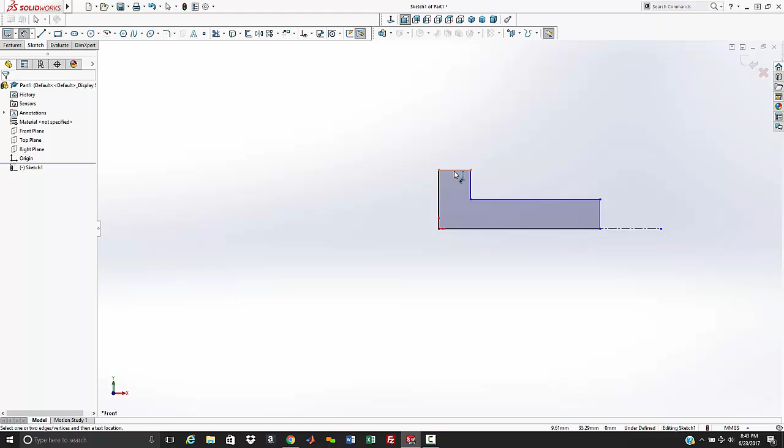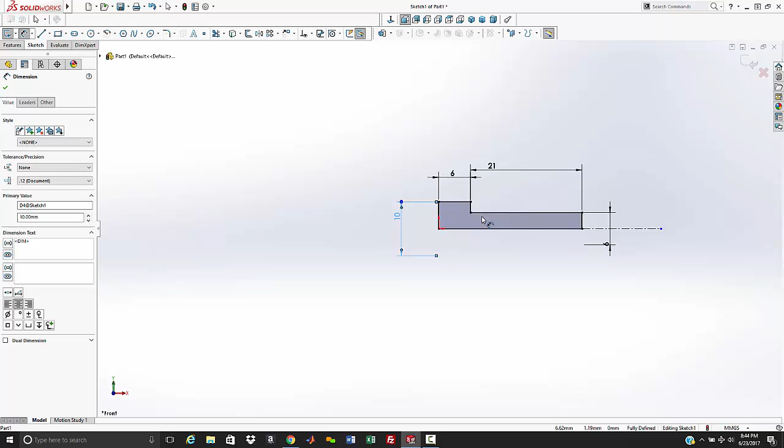Okay, and now we'll bring in our dimension tool. Actually, let's pull this out so we can get hold of that. Now we'll pull in the dimension tool. This here is 6 millimeters. This here was 21 millimeters. And then from here to here, being a diameter, is 6 millimeters. And here to here is 10 millimeters. Right? Yeah, 10 millimeters. Okay. So there's the basic shape of our bolt. Now, I'm going to pause the video here for just a second.

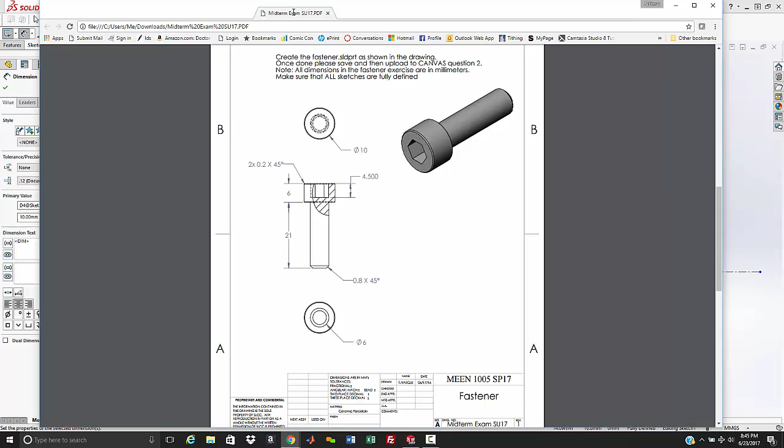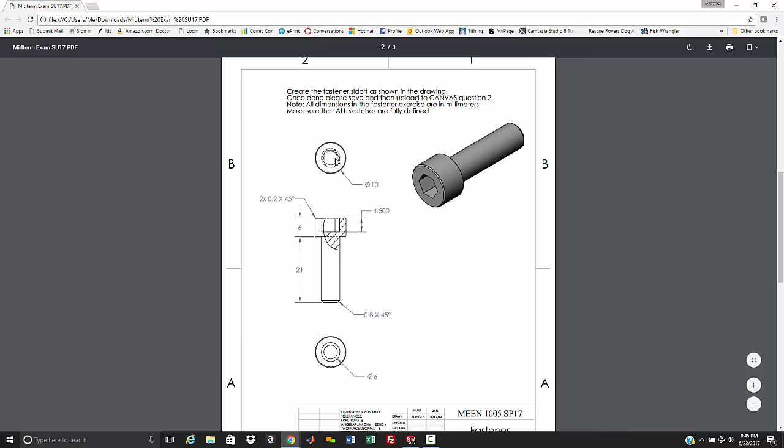Okay, I unpaused the video. Apparently, some of you had problems interpreting the drawing. So this is the drawing that was given to you for the exam. As a PDF, it had all 3 parts in it. So this is the bolt, and the missing dimension on this one is the width of the hex. I gave you the depth of it, but I didn't tell you how wide to make it. If we look here, we can see this would be the diameter of the threads, and that's going out to about the same diameter, so point to point should have been about 6 millimeters.

Again, I did not expect you to try and interpret missing dimensions. Your machinists, when you hand them a drawing and it's missing a dimension, they'll be on your desk saying, hey, Art, this is missing a dimension, put it in. And then you tell Rodney, just go back out and make your parts.

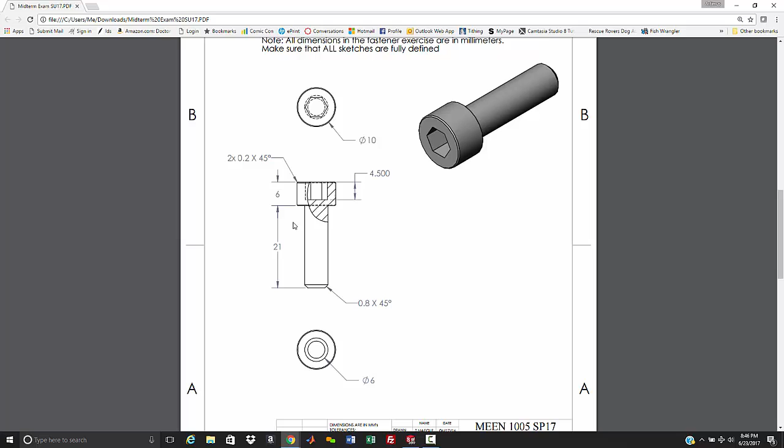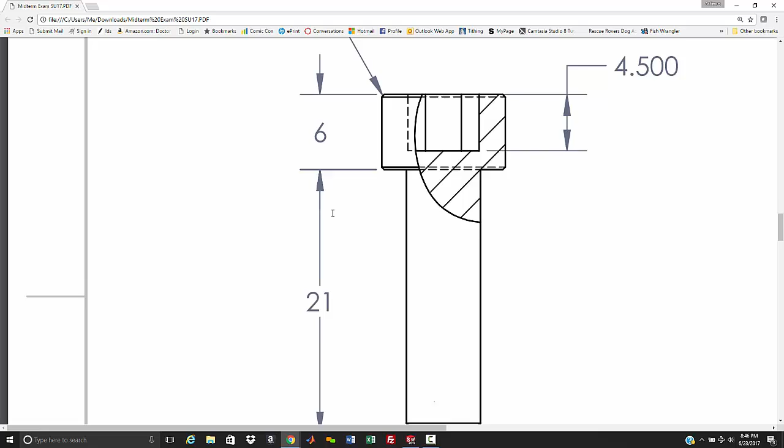Anyway, the biggest problem on this part was this dimension right here. This is a standard call out saying there are 2 times a chamfer that is 0.2 millimeters by 45 degrees. The 2 times means that there's 1 here and 1 down here. That is a standard call out, and every machinist will know that it has to have a chamfer on each side. And it could be that this was too small. Some of you put a radius on that corner. If it was a radius, this would have an R by it, saying that it's a radius.

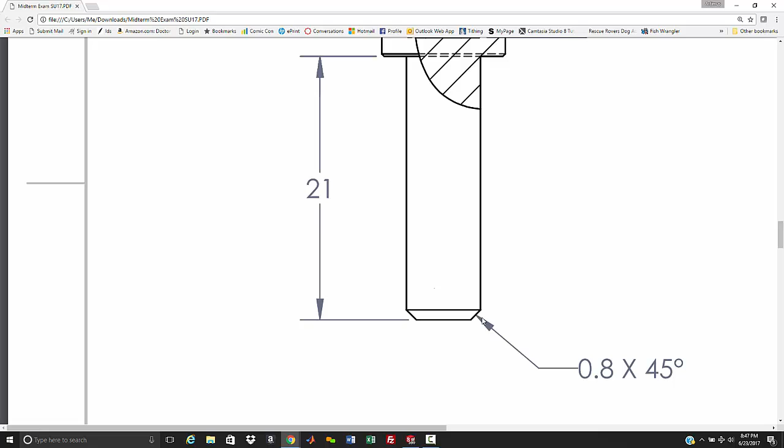And then also, one more thing that was an issue here. Like this one is 0.8 by 45. A lot of you did the 0.8 along the hypotenuse of the chamfer. Standard dimensioning suggests that the 0.8 is a linear distance, so either down the length of it or across the face. That is the 0.8. Again, I did not mark you wrong if you did the hypotenuse.

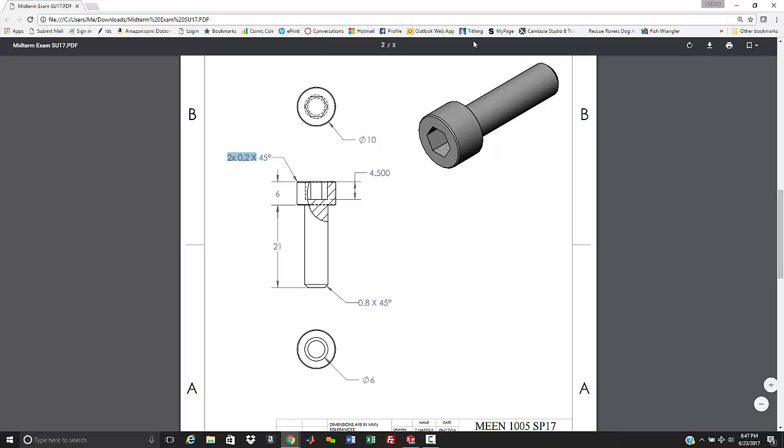I'm not here to teach you how to read blueprints. I'm just bringing this up as an FYI, so in the future you know that that's what it means on a drawing when you see that kind of a call out. So back to the model. So on this corner up here, we need a chamfer of 0.2 millimeters on this corner and this corner.

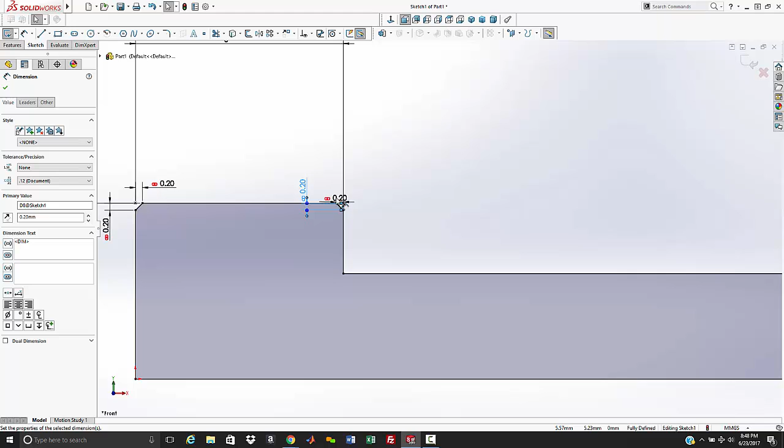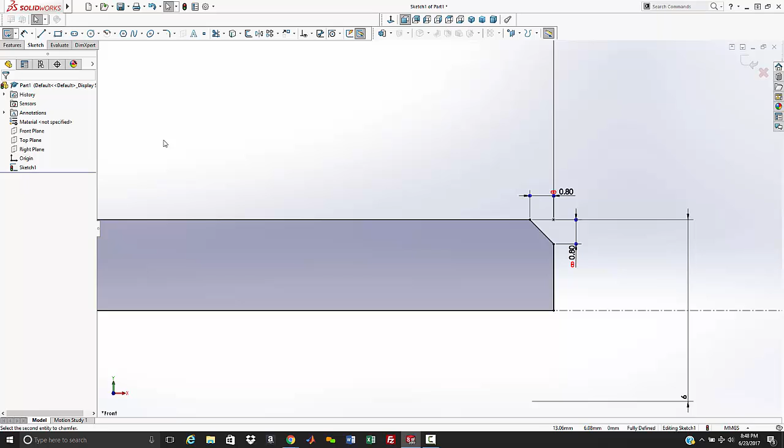And you'll see that it's got the 0.2 down the leg of the chamfer and not across the hypotenuse. And then over here we have a chamfer of 0.8. Again, it's 0.8 across. And I did that in 2 steps because you'll see this little infinity sign here. It's actually a chain link. That means that those dimensions are linked. So if you come in and change this one, it will automatically update all of them. It's supposed to update all of them.

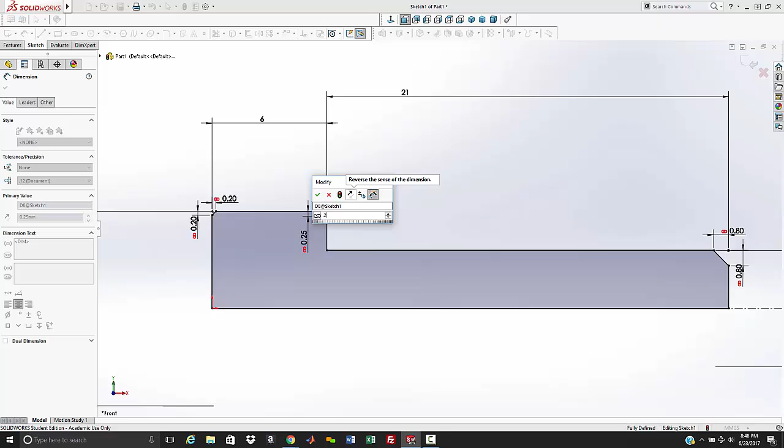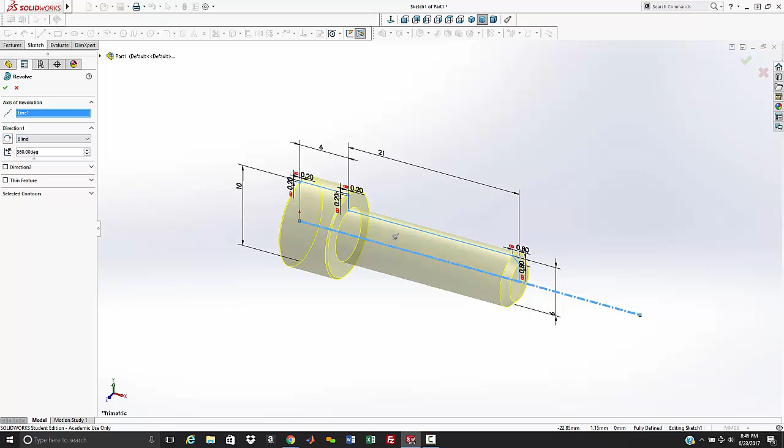That may be something new in 2017 that only does the one associated with its corner. So see, even I learn something new every day. Okay, so there is everything round on this part. And now we'll just come up here and close our sketch, which opens up the dialog box for the revolve. We want to go around the center line because this is the only center line in the drawing. It'll automatically default to it. We want to go 360 degrees and we'll hit OK. And so there is our bolt.

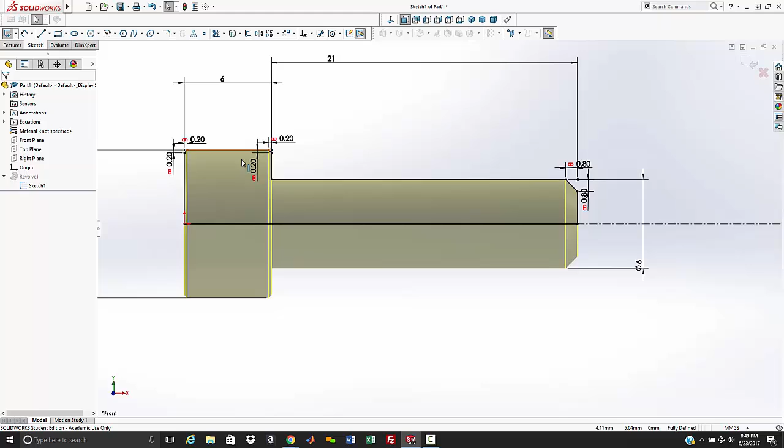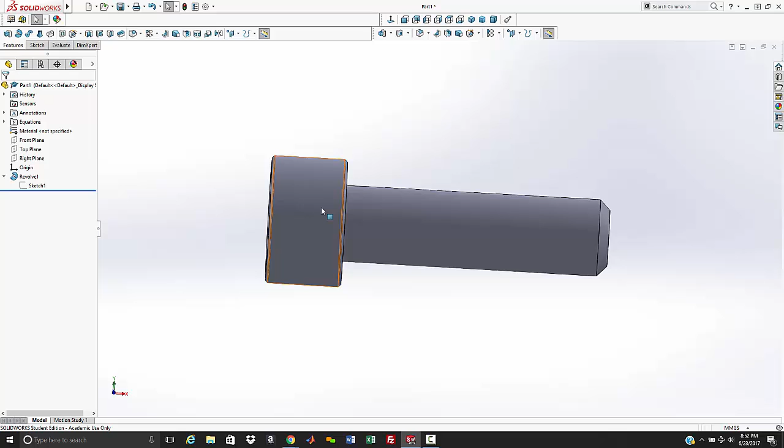Now you'll notice in my drawing that because I took everything off of the origin, everything was black as I dimensioned it. Everything turned black. That means everything is fully defined. Now, if I didn't start here, you see that now everything's blue. Everything's still not fully defined, but things can move. So by connecting that to the origin, everything turned black. That sketch is now fully defined.

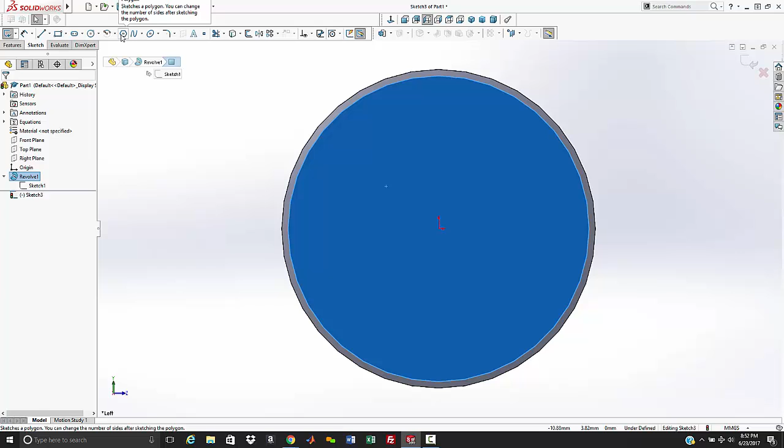Okay, now we have everything modeled that is round on this fastener. The only thing we have left to do is to put the hex shape in it. So we'll bring that surface up and we will click on it and do a cut. And then come in here and grab the polygon and draw it. Okay, so to make this just a little bit easier, because I didn't give you a dimension, and we're going to go 6 across the points.

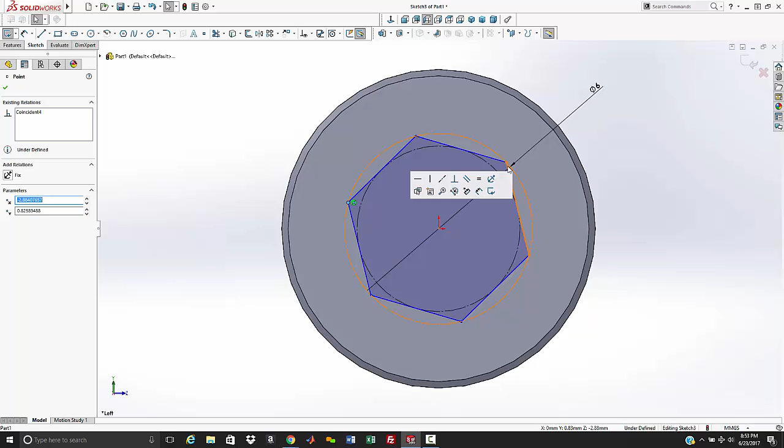I'm going to draw another circle in here and make it a construction that is tied to that point. So now as the points change, that circle changes with it. That just makes it easier to define this to be 6 millimeters across the point. But you notice everything's blue still because it's not fully defined. It still has rotation. So we need to define the rotation of the part. And that can be simply done by grabbing any surface.

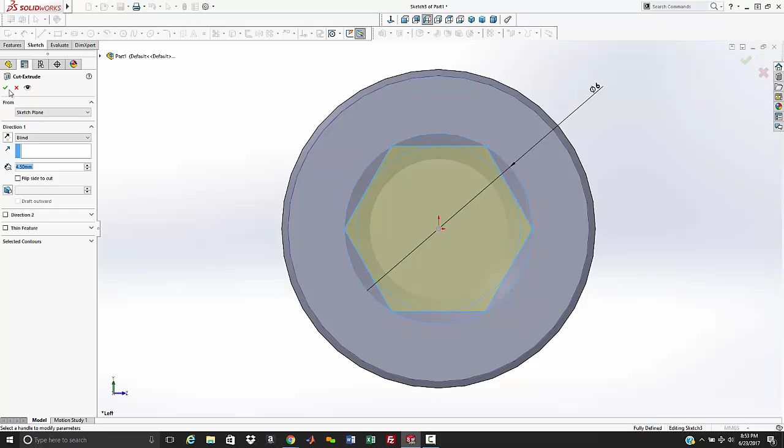There is a possibility in your design that this surface needs to be parallel to some other surface on your part, and you would do so. But for right now, in this part, it doesn't matter. So we're going to grab that and tell it to be horizontal. There we go. And everything's turned black, so it can't move. So this is now a fully defined sketch. And we'll hit the close button and go down 4.5 millimeters. And there we have our screw.

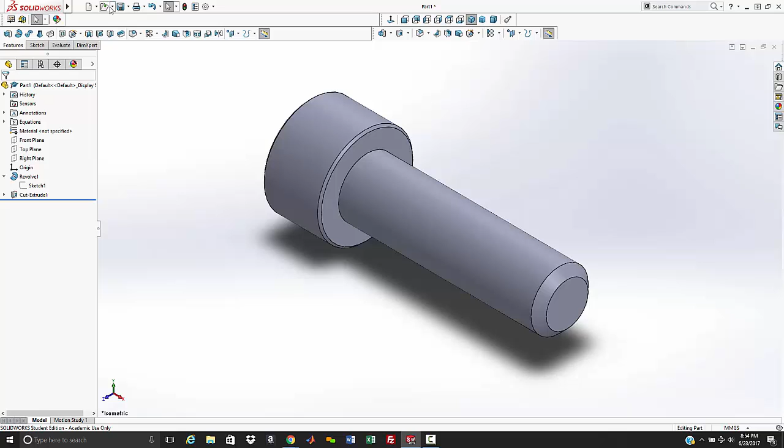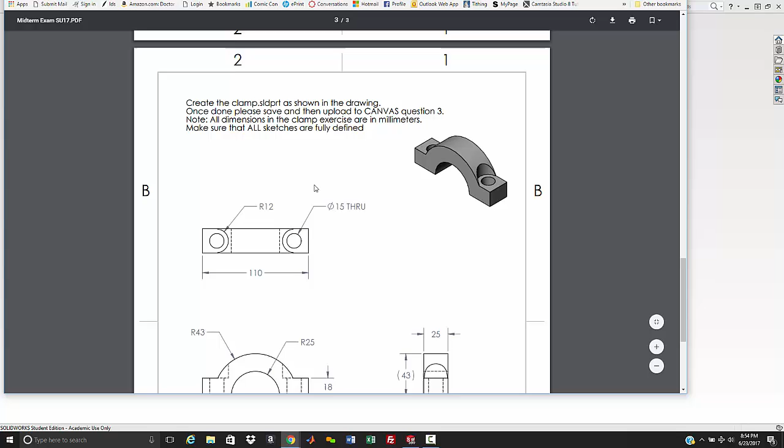You can have SolidWorks put a threaded feature on this, makes it look like a real bolt. We don't cover that in this class. I think you can find a tutorial inside of SolidWorks if you're interested in learning how to do that. So that was the first part. So we'll save this as, what is it? Fastener. Fastener Summer 17.

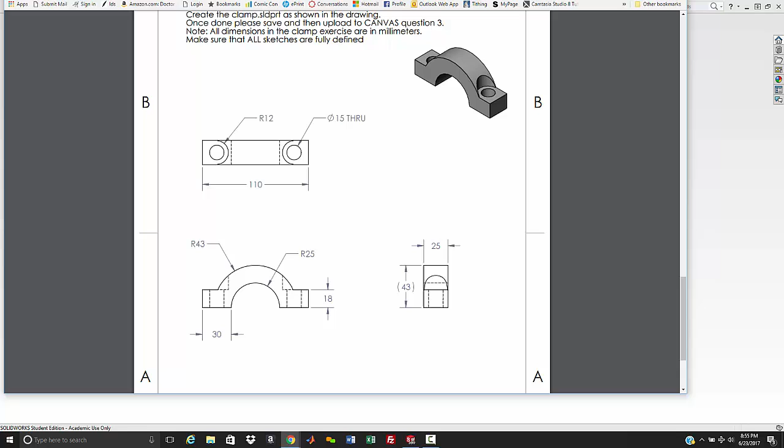Okay, so the next part that was next in line in difficulty was this clamp. It really wasn't too difficult. I don't think there were too many people that had real major issues with this. Again, the biggest issue was fully defining your sketches. And also, there's another missing dimension on this one, and that is the location of the holes, distance between them, or the location from the edge. When I designed this part for this test, I basically centered the hole on this edge here, but because it's not in the drawing, I could not penalize you if you didn't put it there.

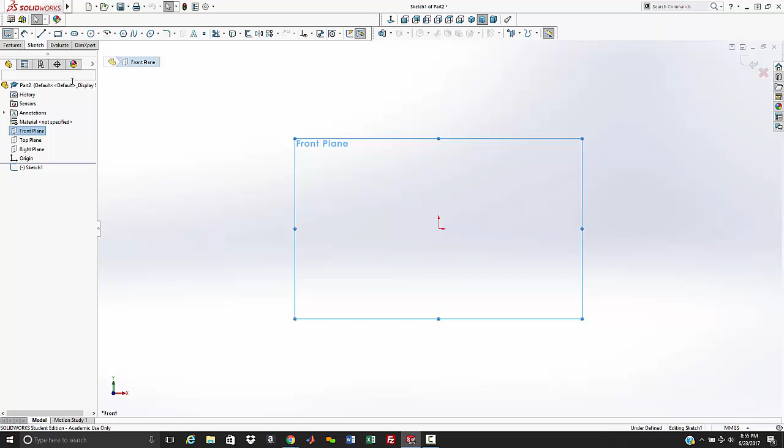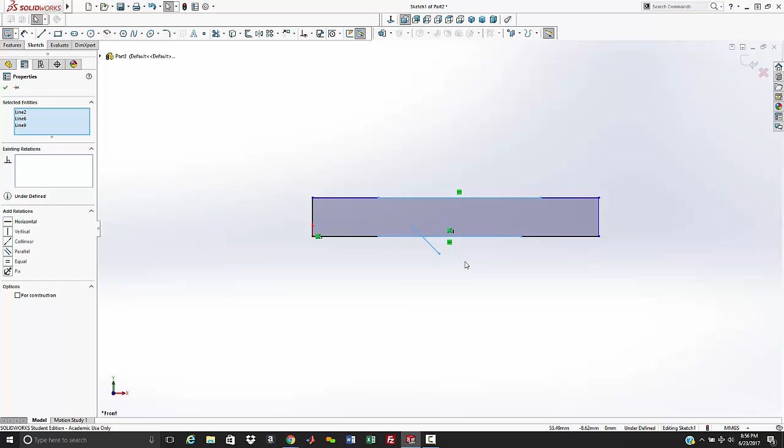So again, I apologize. So now we will make this part. If I can get this out of the way, there we go. So again, we'll start with a new part. This one is in millimeters, so we'll change our units down here. Again, I like to start with the front, do an extruded boss. And again, to fully define everything, I'm going to start with my point in the origin, and I'm going to kind of sketch this out.

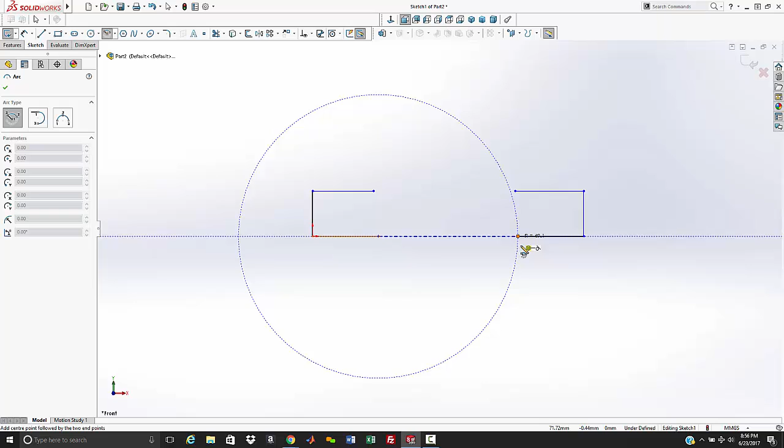I'm going to leave a gap there for the radius, come up, come over, gap radius, over, down, and then I'm left mouse clicking and dragging backwards across those to select all those lines and delete them. Okay, so now I want this one and this one to be collinear. They already are, which will make these two equal. These two here, I want those to be equal. These will come out equal. Oh, that was not collinear, those are horizontal. So if I make them collinear, now when you change one, they both change.

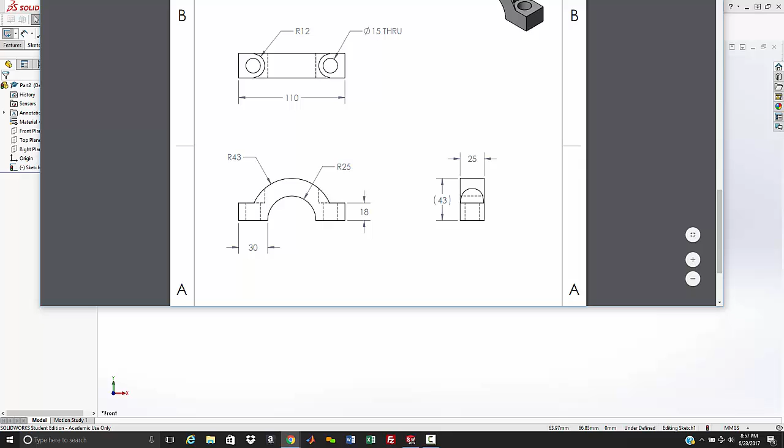Okay, and then we need a couple of radii, so we'll grab our arc tool and go from there. That's the wrong arc tool. Oh, sorry, I'm used to not tangent. 3 point. There we go. And do that arc and do that arc. Okay, and again, there is no indication.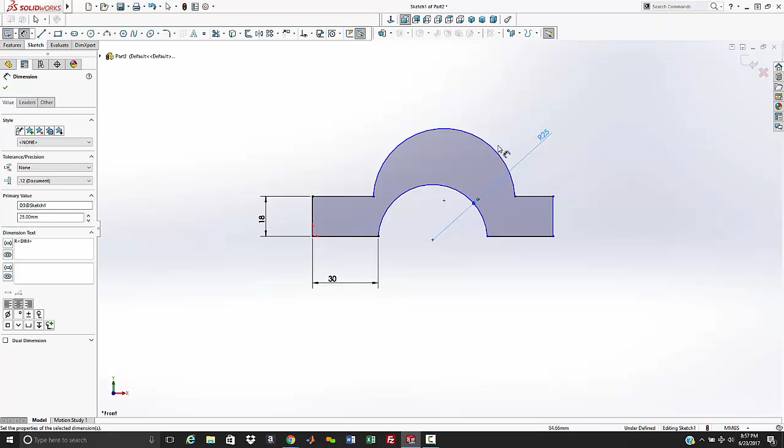That's another missing dimension on this drawing, is the distance to the center point of this. However, you can go backwards because of this dimension here. So let's do it based on the information we have. That was not a trick question. It was a missing dimension. So if you didn't get that, you are not penalized. So let's do what we know.

We know that this here is 30. We know that this is 18. We know that this is 25. And we know that this is 43. Oh, that looks real funky, so we can grab this and drag it over here. And let's do an equals on these two here.

Okay, so to get this 43 reference that was in there, we'll grab that point in the center of that arc and come down to this leg here and make it 43. That's 43 there, that's 43. Okay, and then if we grab these two here and make them concentric, that brings everything in.

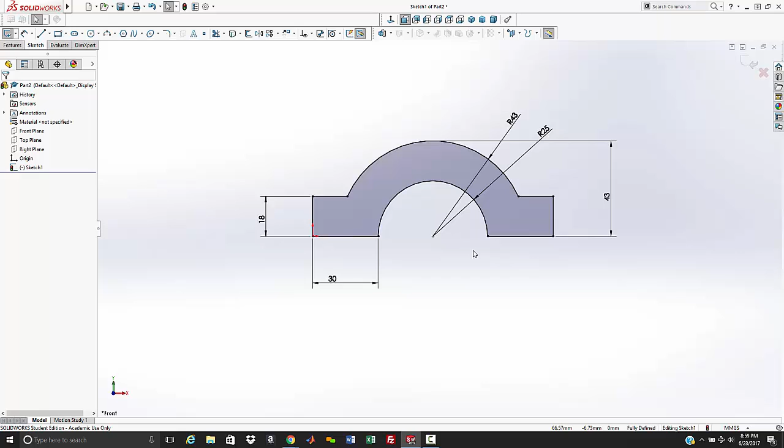Again, that was not, you know, I don't think I knocked anybody off for this because again, the drawing did not specify the center point of these two arcs. I knew when I drew them that those were concentric, but there's nothing in the drawing that would suggest that it would be so.

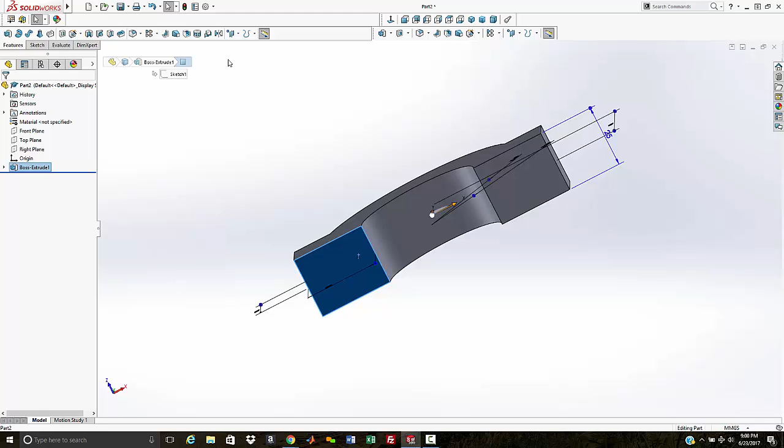Okay, so we have that. Now we'll close that sketch. It brings up the boss extrude dialog box. I like to do mid plane and my distance, which is 25. And so there is the shape of the clamp. Now I come down here, and again, this is one of those missing dimensions. I'm going to do the extruded cut, and I'm going to draw a circle and another circle.

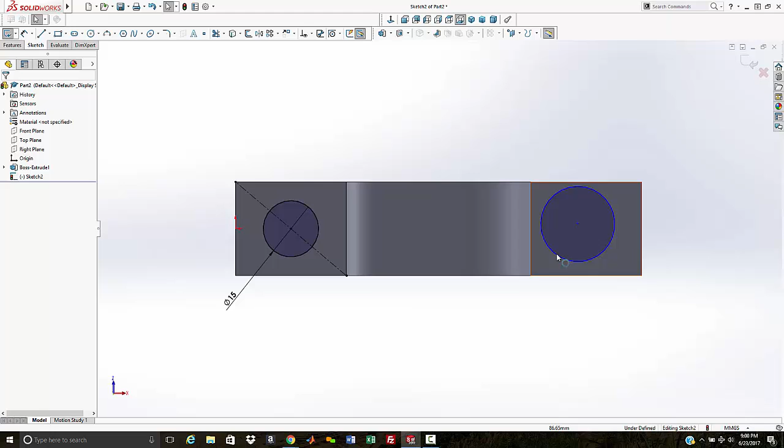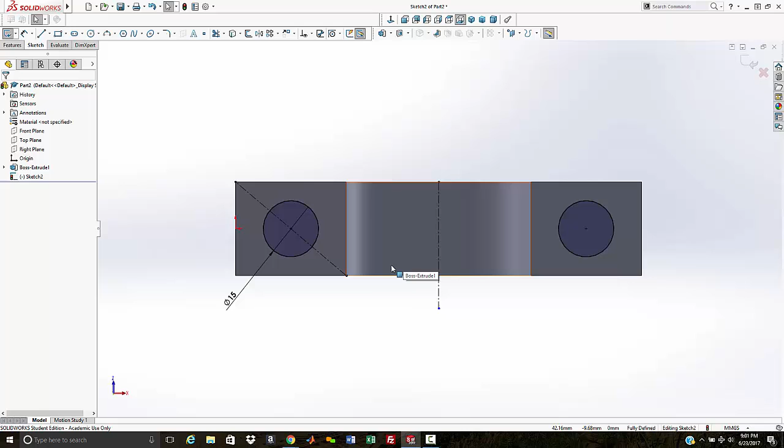There's a couple of ways to do this. The missing dimension does not imply that that is in the center. But this is the way it was intended to be. With this being a diameter of 15, and you'll notice it's black and centered on that space. Now to make this one the same, I would use symmetry. We know that that part is symmetric there, so if we grab this, this, and this, and tell it to be symmetric, it's there.

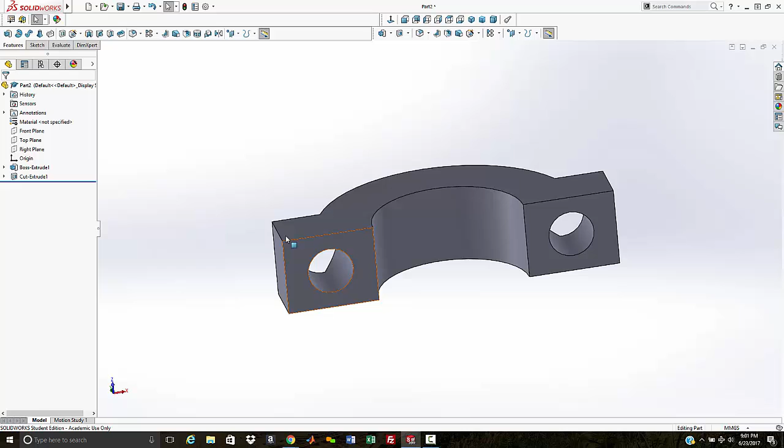That was the way, sorry, I didn't mean to scream at you. That was the intended design modeling that I had expected when I created this part. So now that everything's done, we'll close the sketch, go to a through. We don't need to go both through all, and there is our hole.

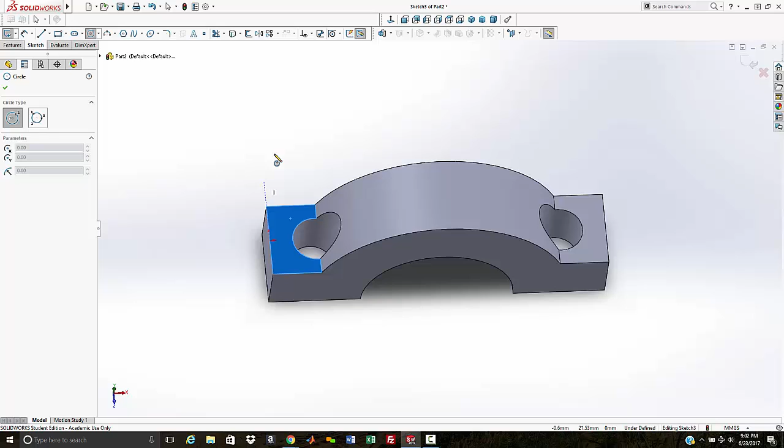Now you could dimension that to the center with a 12.5 millimeter offset, and then whatever dimension you did here. But if you dimension it from the center and you come in and change the width of this to 50, your hole would no longer be in the center. And I just do that to point out, hopefully you learn from my mistakes that I made in my early days.

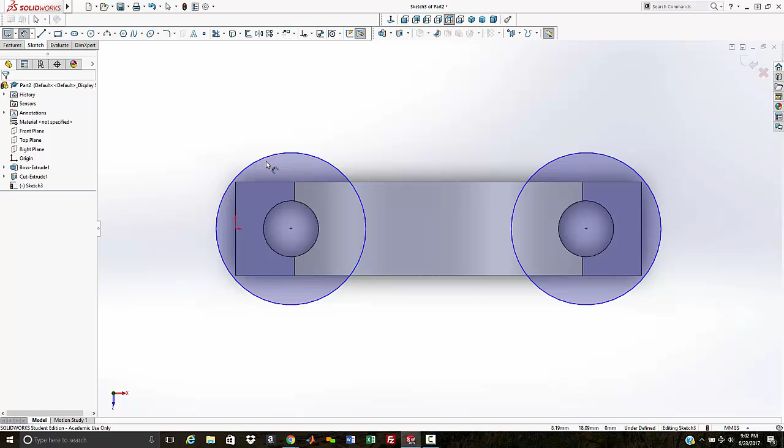Okay, so the only thing we got left to do is to put the little counterbore on top. So I'm going to grab that surface there, do another extruded cut, grab the circle, bring it parallel or coplanar to the screen, and draw a circle. I'm going to grab that radius there and that circle and make those concentric. Another thing you can do, oh, I already did.

If I hadn't, you could bring that up until the center lines, make those two. And then we're going to grab those and make them equal. And then we have a radius of 12, so that would be a 24. And close the sketch, brings up the dialog box. Now that's cutting down. We don't want to cut that way, so we need to reverse the direction. And you can leave it with the blind or go through all. And there's our clamp.

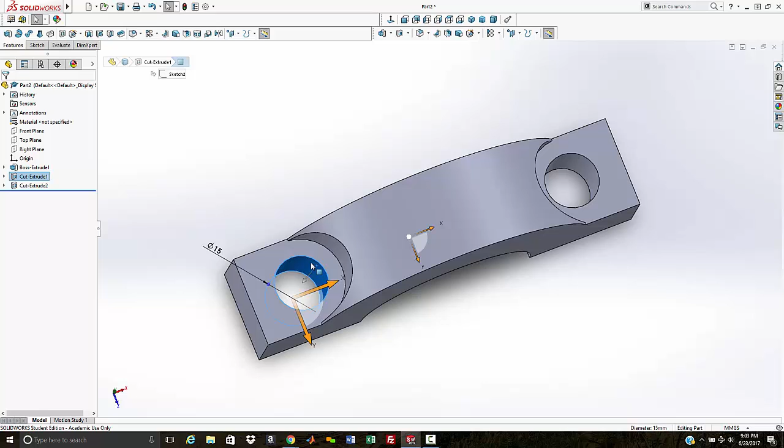So it's pretty simple. Like I say, the biggest issue with this one was on these holes here. A lot of people didn't fully define your sketches. Again, maybe it was unjustified because there were no dimensions given, but there should have been some kind of, one of them had circles, 2 different diameters.

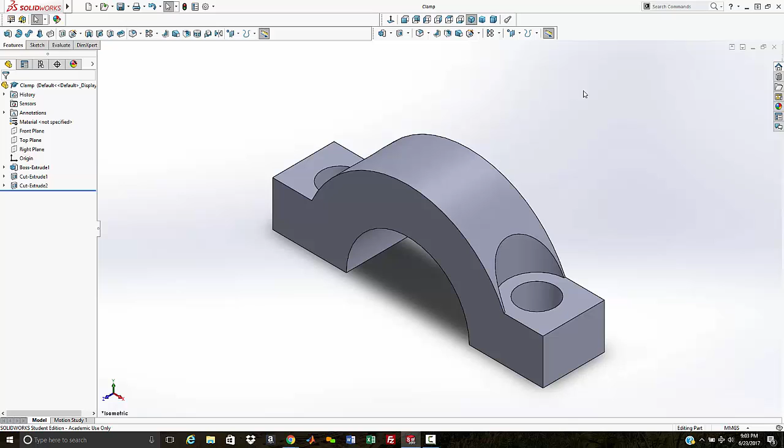Okay, so we'll save this part, not open. We want to save. Save this as, I'm looking at there, not down here, clamp. Oh, and I didn't put a date. Oh well, we'll be fine.

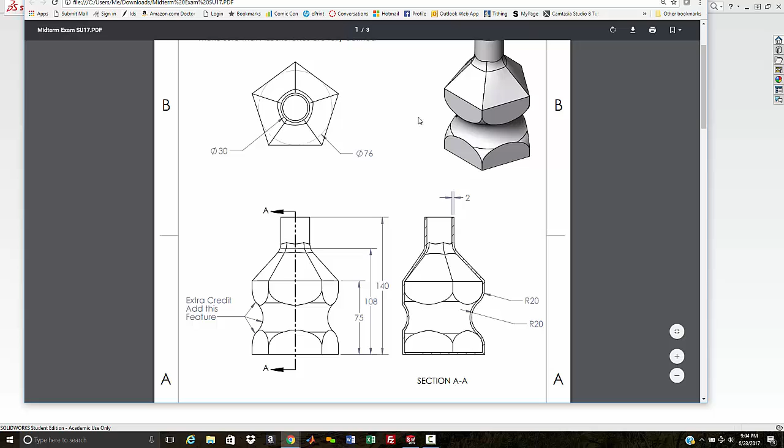Okay, so now the one that caused the most heartache for students. I think a lot of you made this part a lot harder than it had to be. And I guess that's, in my defense, we gave a part similar to this last semester, and it didn't have the radius. Let's pull that sketch down so you can see it.

It didn't have this radius here in it last semester, and that may have thrown everybody off. But the model itself was a repeat from last semester. So let me go through and show you how I would model this myself.

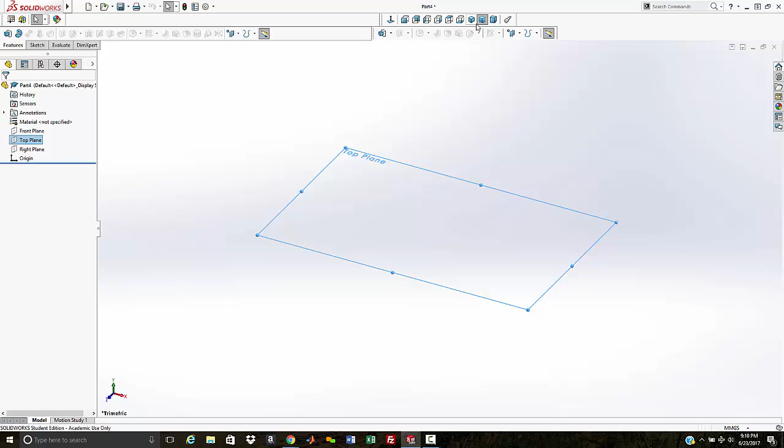Okay, so to do this part, we'll bring up a new part file, change our units to millimeters. And on this one, I'll start with the top instead of the front because we're going to build from the top up instead of from the side. It's not critical which one you use. It's just personal preference. So I'm doing the top.

I'm going to do an extruded boss. I'm going to pull down the polygon and do a 5-sided figure. Okay. So now, if you needed to edit this, change the number of sides, if you just click on any of the lines, come over here into the existing relations, or right mouse click on that and edit polygon, it'll bring up the dialog box for that, and you can change anything you like. I needed 5 sides, so apparently last time I did it, I had a 5-sided figure.

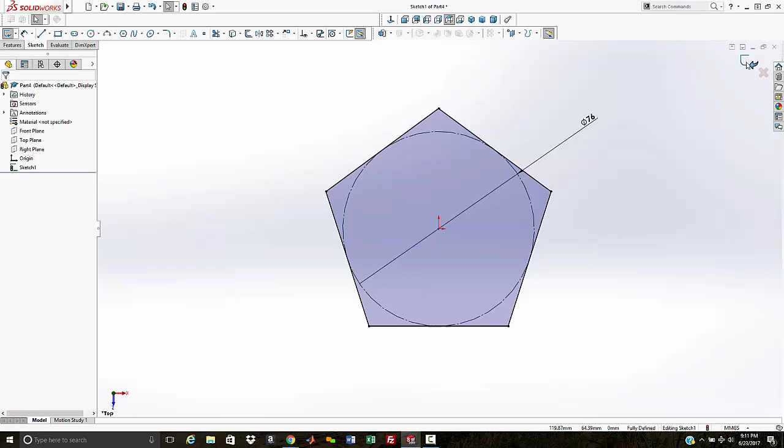Okay, so we now have our 5-sided figure, so now we need to turn all these lines black. So first off, I'm going to grab this line down here and make it horizontal. That just makes it so that it can't rotate. It now just goes bigger and little. We'll pull out a dimensioning tool and come in here and give that inner circle a diameter of 76 millimeters, basically from the drawing. So now we have our base.

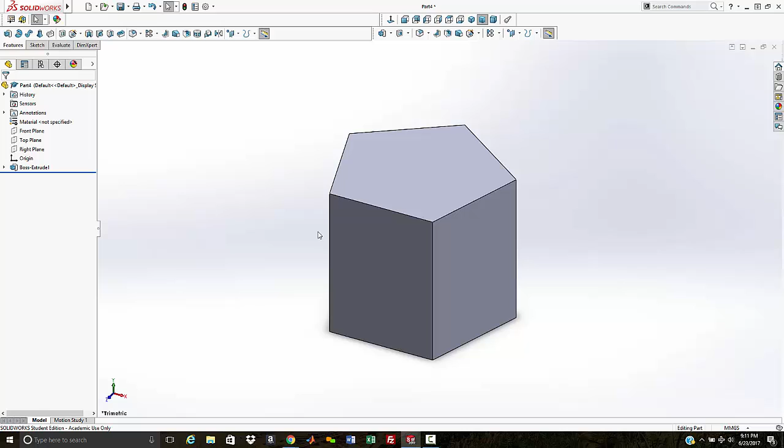If we close the sketch over here, it brings up the extrude dialog box. We want to go 75 millimeters up. And there is the base of our bottle. Okay. The next step is going to be to put the loft in for the angled surfaces.

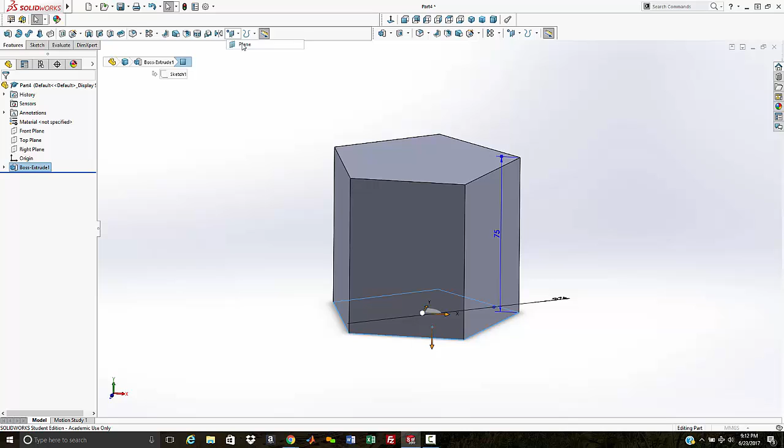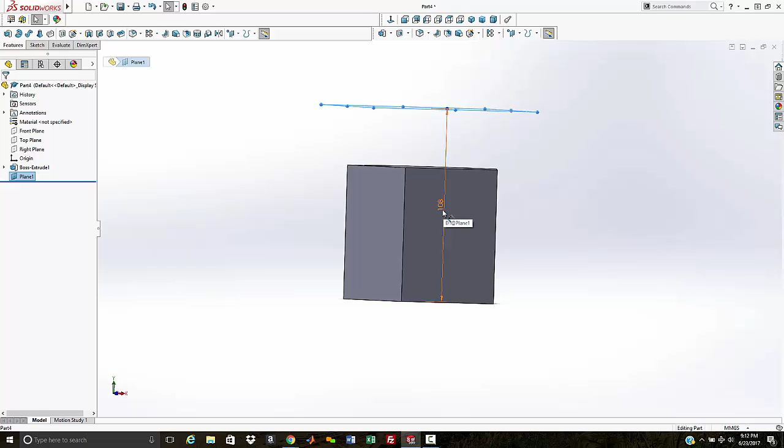So the first thing we need to do is a reference plane 108 millimeters up from that. So I'm going to select that surface because that's the surface that is referenced from in my drawing. And I'm going to come up here to references and do a plane. And look at that, 108 already, flip dimensions. And there we have a plane that is 108 millimeters from there. I do that because if you ever wanted to check and make sure that you're correct, you can just double click on that. It pulls up 108 and it matches your drawing. It's just, again, one of the artisms that I like to do myself.

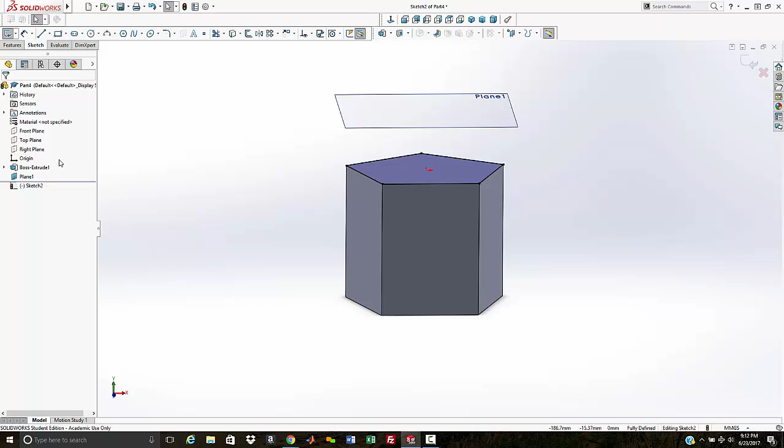So now we got our 2 planes that we need to do the sketches for our loft. So first off, our base, we'll just come down here and create a sketch, and because we want it to match that surface, we'll just come over here and convert entities, which will take that and create a sketch for us of the edges that are already black because they're all tied to the edges of that part.

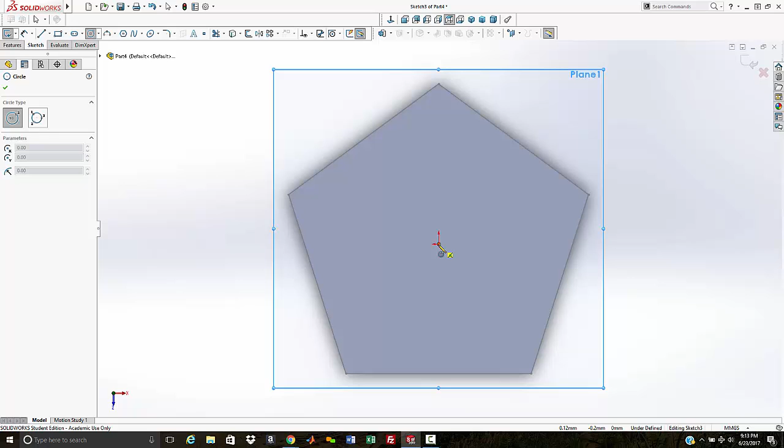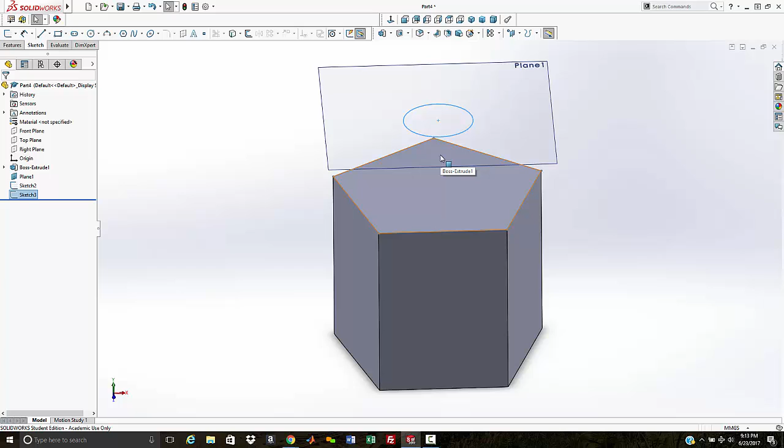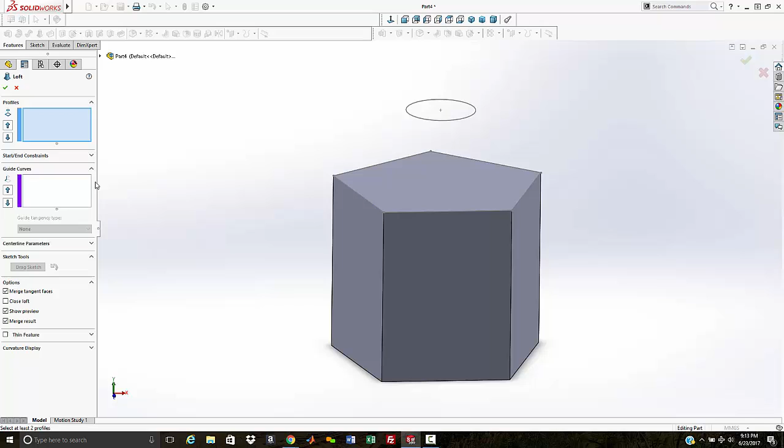Our next sketch will be up here. We need to have a round surface for the round top of our bottle. You notice that it went through the plane to the back; I like to keep it in the front, so I hit it again to bring it up front. Again, it's just another artism. I like to see where I'm working. So I'm going to draw a circle here, and I'm going to dimension it to the 30 millimeters from the drawing and close that sketch. So now we have the 2 sketches we need for the loft for the angled portion of our bottle.

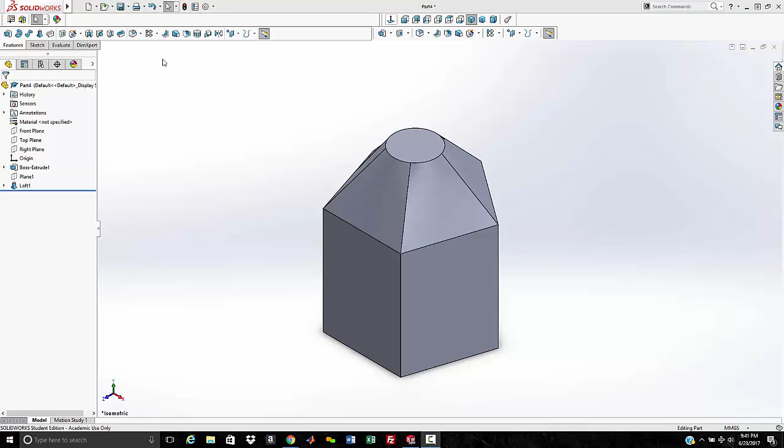Again, I don't like looking at all these sketch planes, so I'll come in and right mouse click on the plane and hit hide, and it goes away. It just makes your part a lot easier to look at. So we got our sketches, so we're going to come over here and grab our loft, and the profile curves are this one and this one, and there we have our angled surface. Comes right up off these edges and goes from a pentagon into a circle.

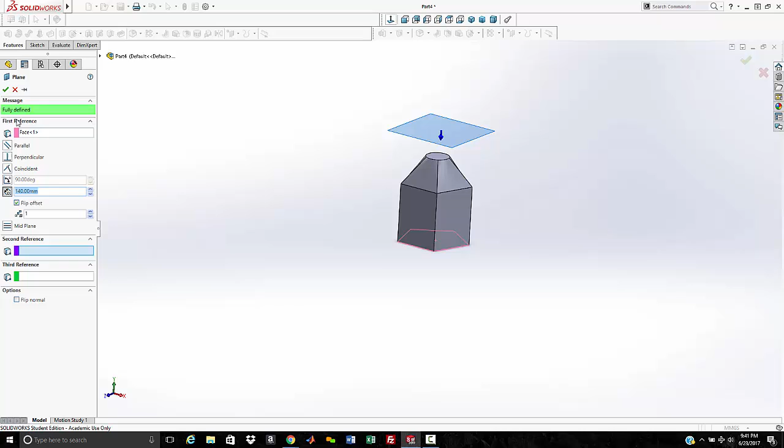Okay, now that the loft is done, we need to add the neck to the bottle. Again, keeping with the same method, we're going to reference it from the bottom of this part because that's what's in the drawing. So we'll select that surface, come up here and select the plane, and we're going to be offset 140 millimeters. And it's down there, but we want it to the top, so we're going to flip the direction and call it good.

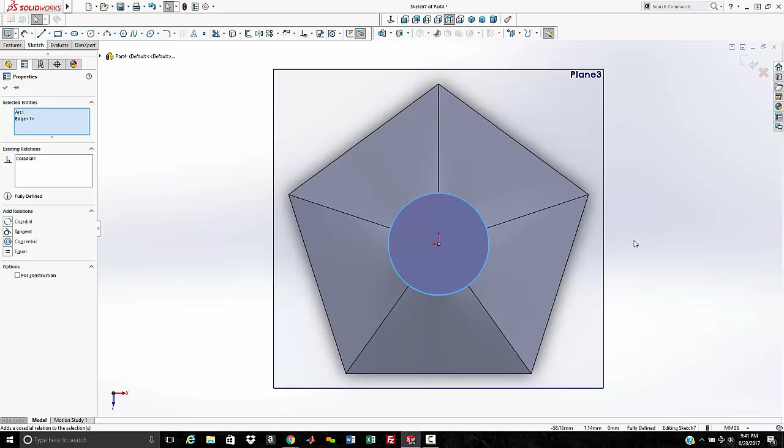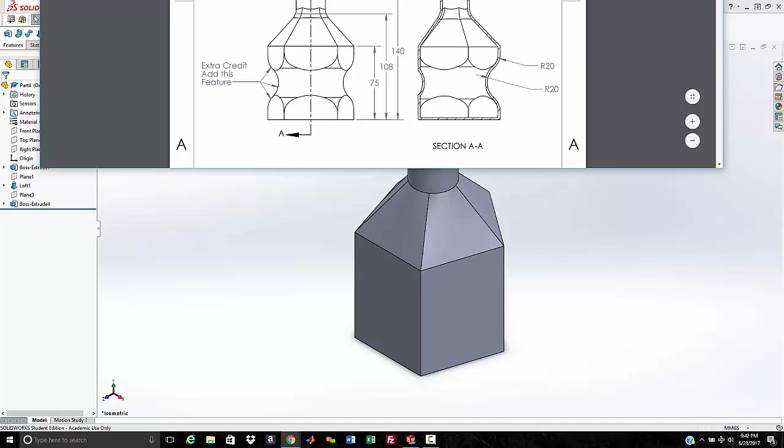And we will select this plane and do an extruded boss. Do a double take to get that to the right direction, and circle. We'll take that circle and that edge and make them coradial. And then we'll close our sketch, bringing up the dialog box. We're going to go up to surface, and we're going to go up to this one here, and right mouse hit OK. And again, we're just going to hide this plane. Right mouse click and hit hide.

So there's the neck. And again, this part is also a victim of missing dimensions. The radius is not dimensioned. Also, the center point of the extra credit radiuses was not dimensioned. So if you put any radius in there, you got all the extra credit. But to put the radius in here, we'll select that surface, hit our radiusing tool. We want a 15 millimeter radius and hit OK.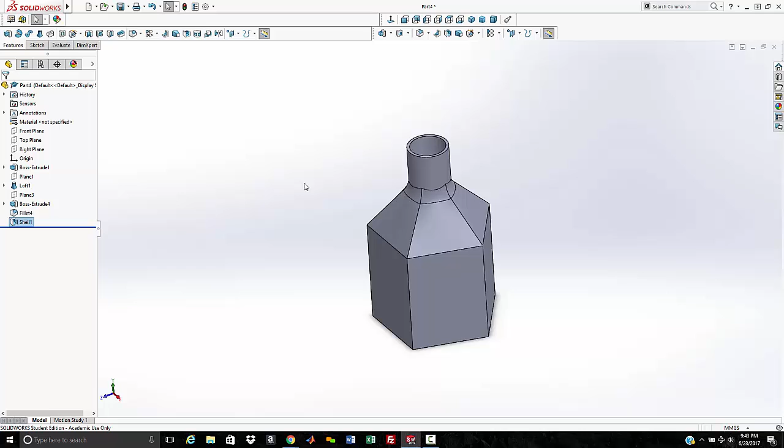So there's our bottle, and then we'll just click this surface, go to our shell, and we want a 2 millimeter. Show preview to the inside and call it good. And so there's what's required for the exam.

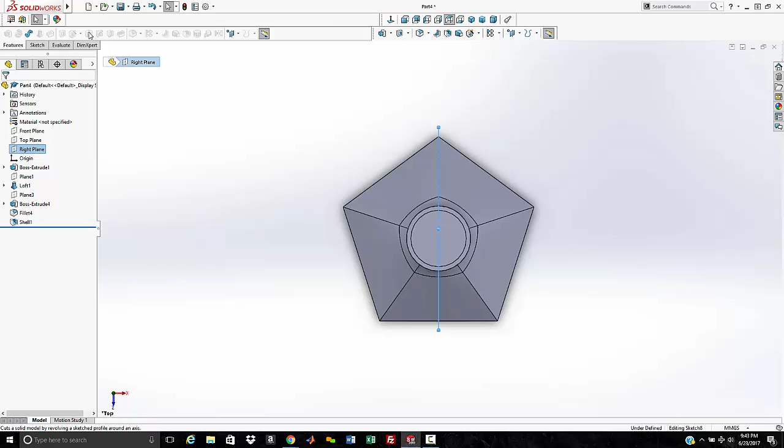Okay, now to do the extra credit, again, there's several ways to do all these things. This is what I would have done. If we look at the top of this part, we can see that this edge here is on the right plane, and it'll go all the way out. If we take the front plane, it doesn't hit the maximum corners, but the right plane does. So we're going to do our cut revolve, a revolved cut around that axis.

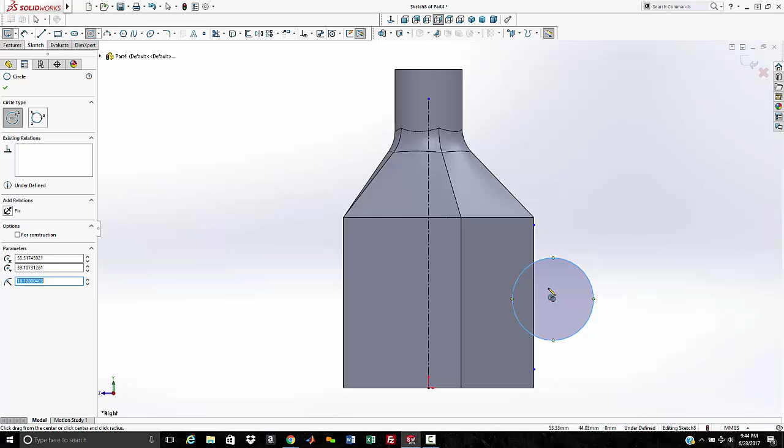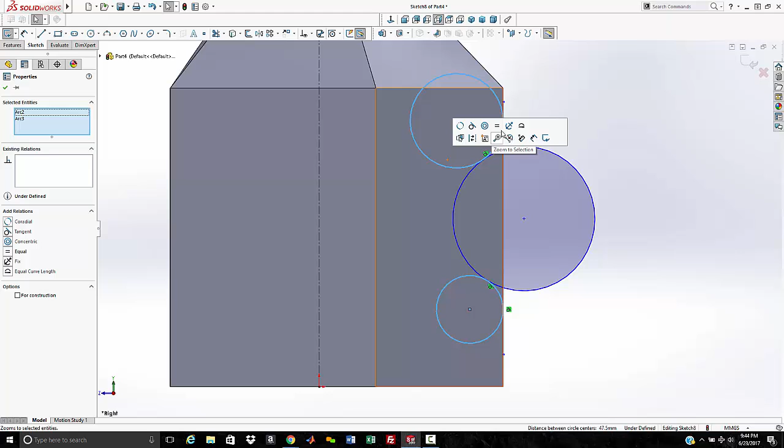Again, it's not the only way to do things, but this is the way I would do it. I drew a line on here on that edge so that we cut to the edge. We'll need our radius of revolve. And then we need some radiuses. So I would bring this in, and this one, and this one, and click those two and make them tangent. Click those two, make them tangent. Click those two, make them tangent. Click this one, and with the control key down, hit that one and make those equals.

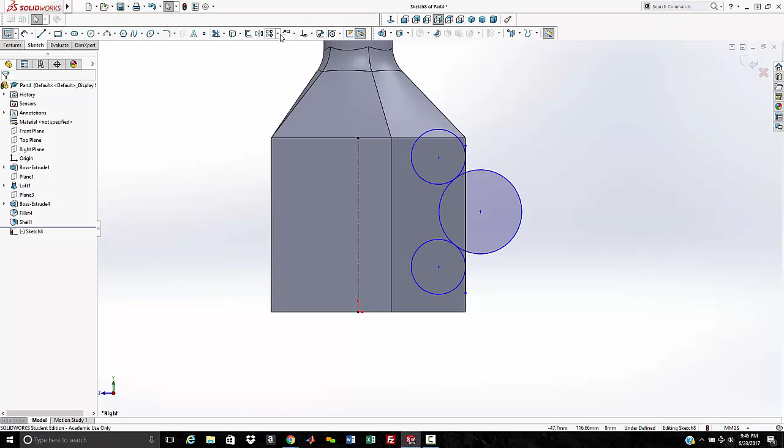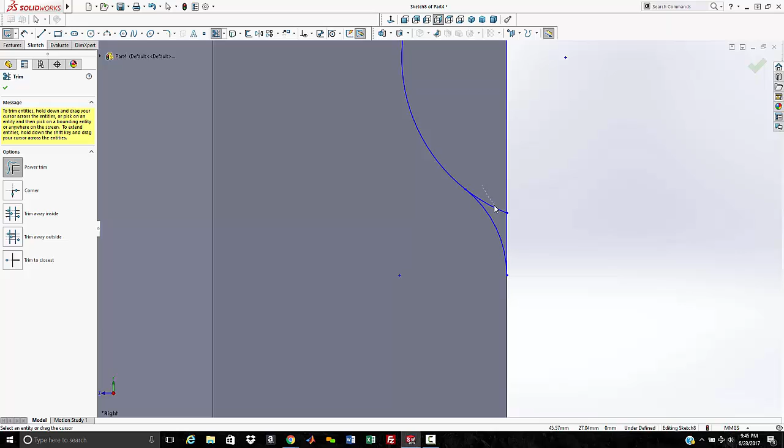We're also going to do one more thing here. We're going to bring this here and put it on that edge there so that that line is the length of that edge. You'll see why in a minute. Okay, so now we're going to trim away all the stuff we don't need. I have mine set up to where with a quick key on my computer in my office, if I hit T it does it, but I don't have that set here yet. So we'll hit the trim, and we'll trim off those parts that we don't want. We don't want that part, or this part, or that part. That leaves us with our radii that we need to do our cut.

Okay, so again, the reason for doing this one to the full length is now I can come and quick snap to the center point and go to the center point of my arc there and make that line horizontal. This is now symmetric. So no matter where I go, it's always in the center of the part. Again, that was something that was not dimensioned in the drawing, so you wouldn't know to do that other than by visually looking at it. So now we've got to dimension these two radiuses. This one has a radius of 20 millimeters, and the other one is also 20 millimeters.

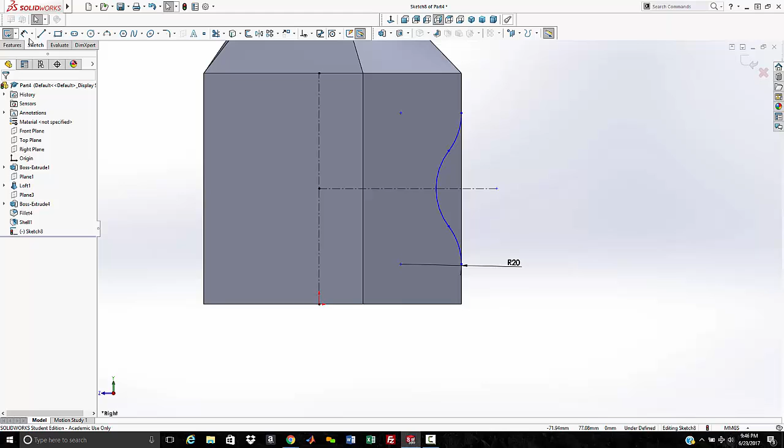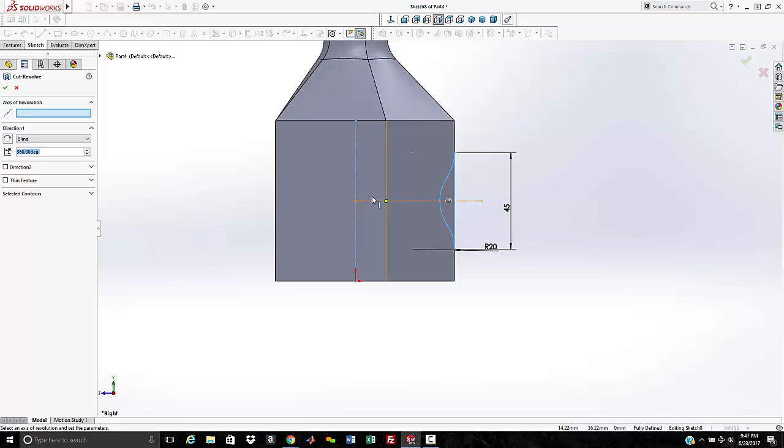So we could do a couple things. One, we could put a 20 millimeter call out on it, or we could also grab one of those and that surface and make those equal, and now they're all 20 millimeters. So again, the reason it's not fully defined now is because we don't have a dimension to the center of this arc here, so we don't know how deep to go with that. So I'm just going to put a dimension on here. Let's say that's 45. We'll look at it after we do it and see what it does. Okay, so we're fully black.

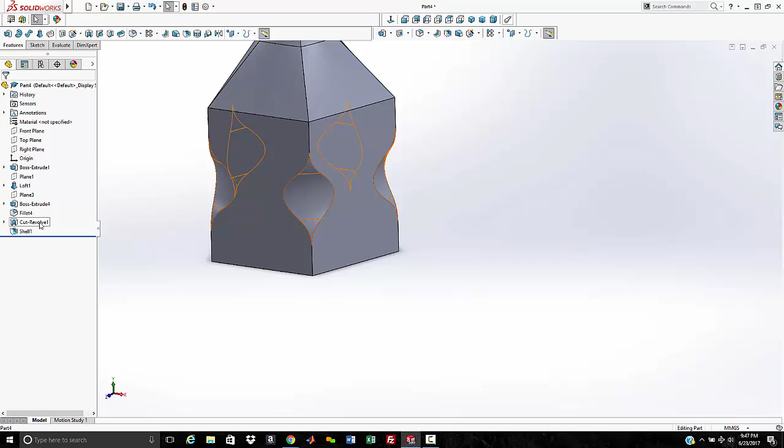Okay, but this time now we've got two center lines in here. So when we close this sketch and bring up the dialog, it doesn't know which one to choose. So with this box highlighted blue, we'll come over here and select that one to say that that's the one we want. And then we'll hit OK. And we probably need to do that before we shell. So I just drag the shell down after the revolve cut.

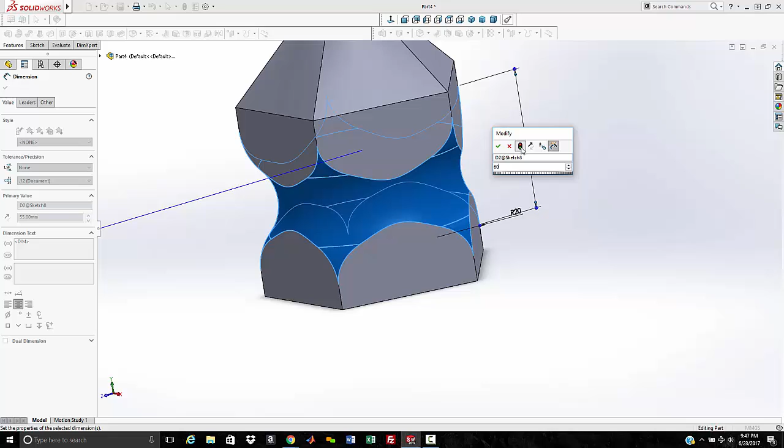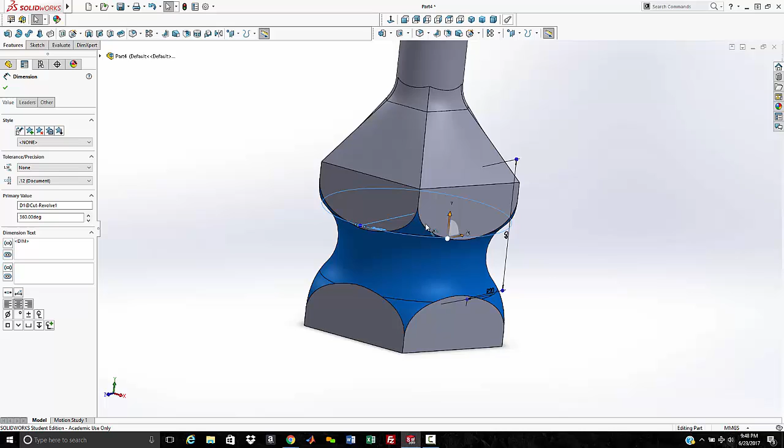Okay, we're not going all the way through, so we'll come and change this 55 here and make it a little bit taller. I'm just scrolling the center mouse, hitting this button, and there we go. Okay, so looks like maybe 60 millimeters. That looks like about the same as the drawing. So that's how I would put those radiuses on the part. It's plain and simple. And there we have a completed model.